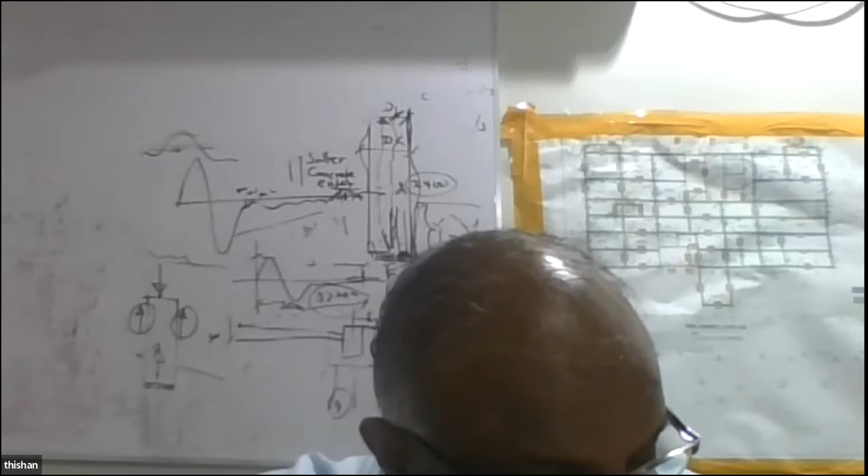Prima, can you hear me now? Yes, sir, we can hear you. I'm just trying to see whether I'm using two devices today. What I'll do is leave my phone and just check whether you can hear me. Can you hear me now? Yes, sir, we can hear you. Last time the computer did not work, so I had to use my phone, but if I use only the computer, it's better for all of us. So now can you hear me? Yes, yes, I think the sound is not that strong, very, very light. If you can increase the volume, sir, that's... yeah, please. Now just try this one, right? I'll come on the phone and see whether it's clearer. Just one moment. Recording in progress, can you hear me now? Yeah, well, now it's better. Better, right? Okay, it's better, right? Okay, yeah, now it's okay, sir. But am I getting an echo? Right, okay, can you hear me now? Yes, yes, yes, no echo now. Right, okay, now it's fine. I'm using my phone for audio and video, and I'm using the computer as well, right?

Okay, so what I'll do is, last time we started the problem, so today we'll go ahead with that. Can you see this SAP 2000 screen? Yes, yes, we can see. So what I'll do is first we'll change the units to kilonewton meters, and I'm going to do the modeling part today. I will explain the important points as we do the modeling.

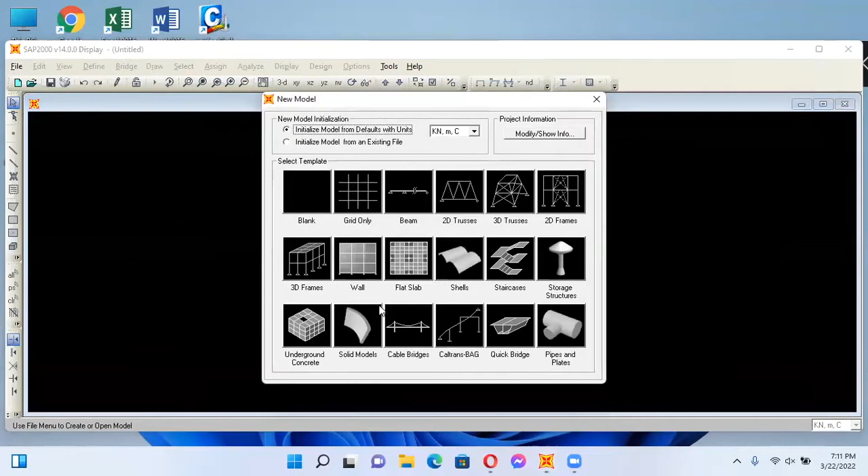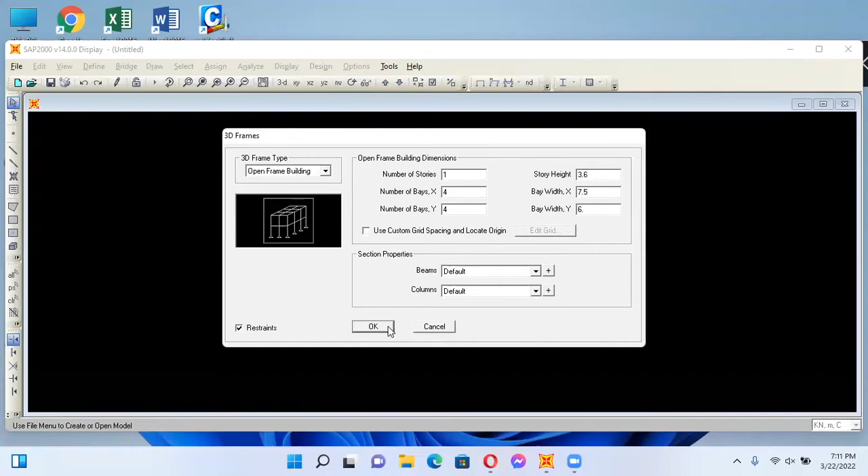I'll start with a new model, and I will go for a building 3D frame. Number of stories, I'll go for one story first, number of bays 4, and number of bays in the y direction 4, floor to floor height 3.6 meters, in x direction 7.5 meters, y direction 6 meters. So I'll create this particular building, and the building looks like this. You can see the building. Yes. Okay, right.

So basically, this is the building, and if you want, I can show you the view at 3.6 meters. So this is the building, and you can actually move the whole thing and bring it to the center. But I'll keep it as it is because otherwise I have to change the grid location as well. Sometimes it's preferable to have the grid starting at one of these places, but in this case I won't worry about it. The reason is, when the grid starts at the lowest corner, you always have positive values; otherwise you have some negative, some positive, which can create problems.

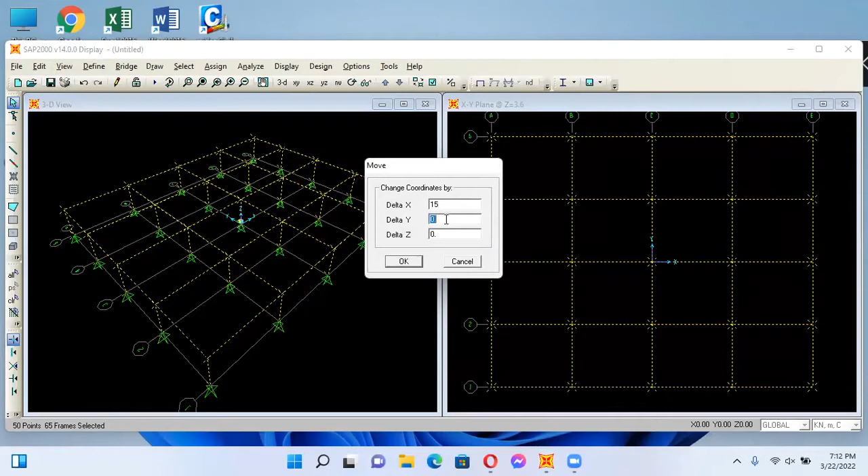But okay, so one option available is to select all and move - by 15 this way in the x direction, and 12 in the y direction. But the moment you do that, you will have to define the grid.

Define the grid - where's the grid? Yeah, grids. Global, modify, show the system, and here you start with 0 and then 7.5. So rather than giving ordinates, you go for the spacing, and you say here also 7.5, and 7.5 - sorry, not ordinate spacing. Here you change it to 7.5 each. I put it to spacing and see ordinates. Now you can see it starts from 0 and going up to 30.

And I'll do the same thing for this one - go to spacing, 0, 3.6. When you go to ordinates, I'll make it 0, 6, 12 - spacing.

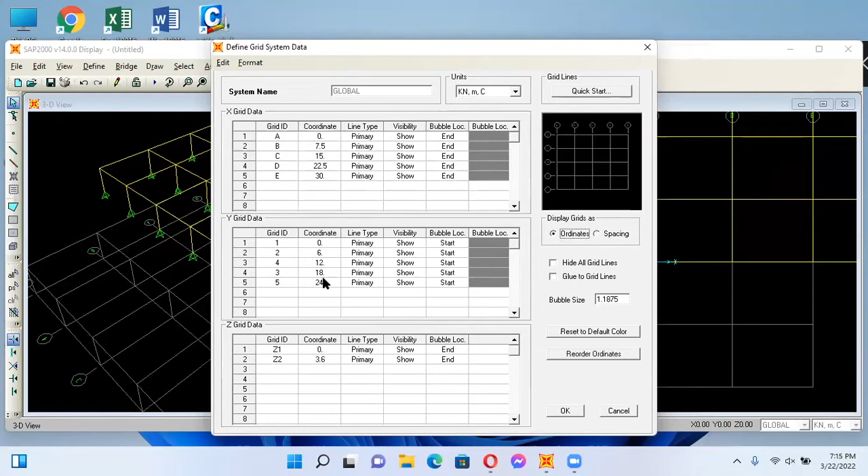Right, now it's okay. Now you can see the grid has been adjusted. It goes A, B, C, D, E, and this way 1, 2, 3, 4, and the origin is at this point.

So the most important thing is, you have to define so many things. First, materials. I'll make a copy of the material, go for advanced property display, and say concrete, beam concrete. I'll start with something like 30 megapascal concrete, but later you can change it. Elastic modulus of 30 megapascal is 27 e to the power 6, and the unit weight is 25, mass density is 2.5, because Eurocode says the density is 2.5, and the strength of the concrete is 30 megapascal.

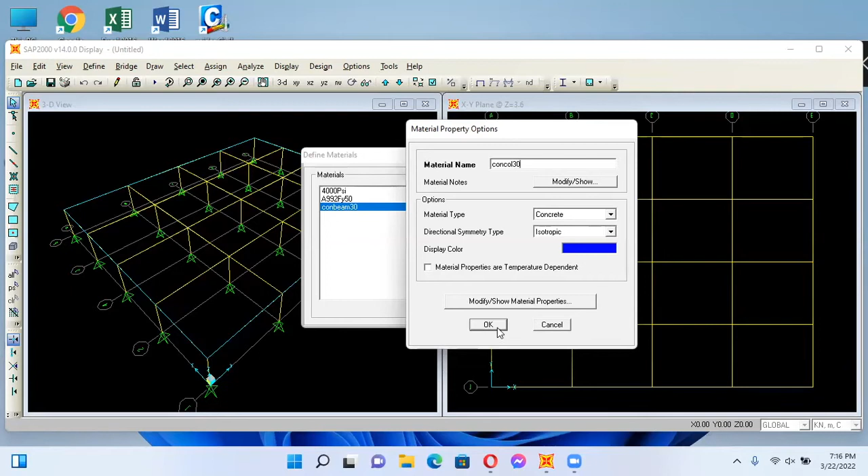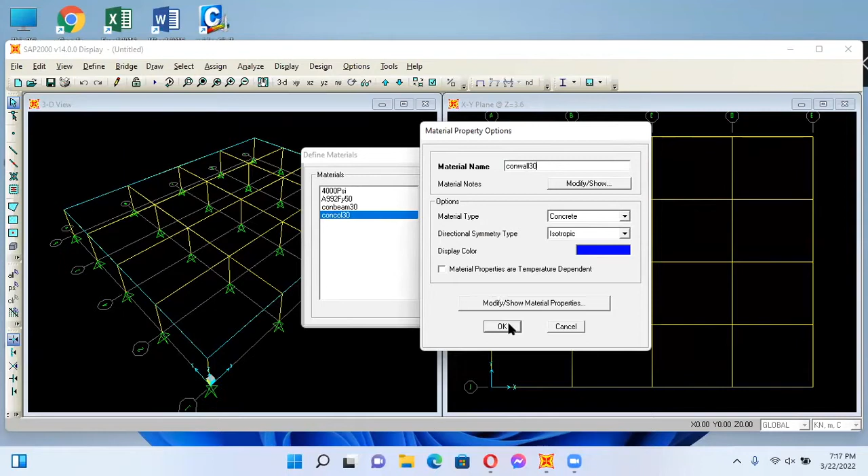We say okay. So basically we have one material, then add a copy of the material, concrete beam 30, and we say it's column concrete, column 30, concrete column 30, say okay. We have concrete beam 30, concrete column 30, and we have columns, beams, and add concrete wall 30. So we are having everything out of 30 megapascal. I think that day we did something like that, okay, I say okay.

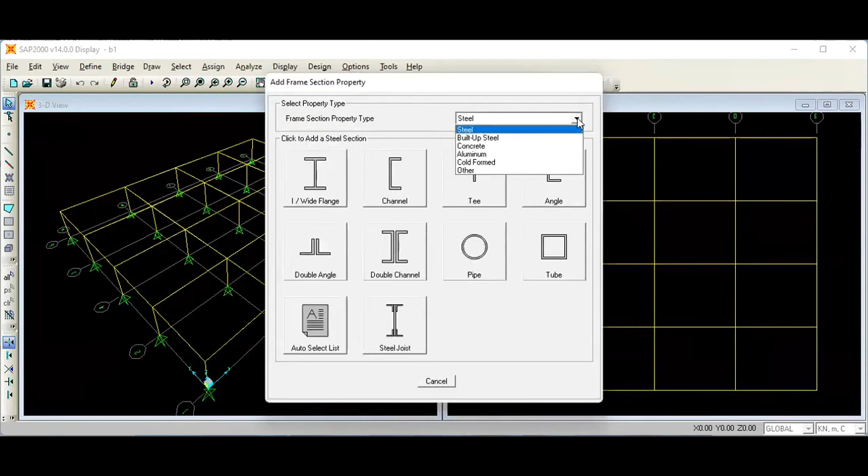We have defined 3 materials, it's okay. Then define section properties, frame sections, and add a new property. I'll go for concrete, and add a rectangular section of column concrete, beam concrete 30. I'll say beam 600 by 400. We'll not worry too much about it. Depth is 0.6 meters, width is 0.4 meters.

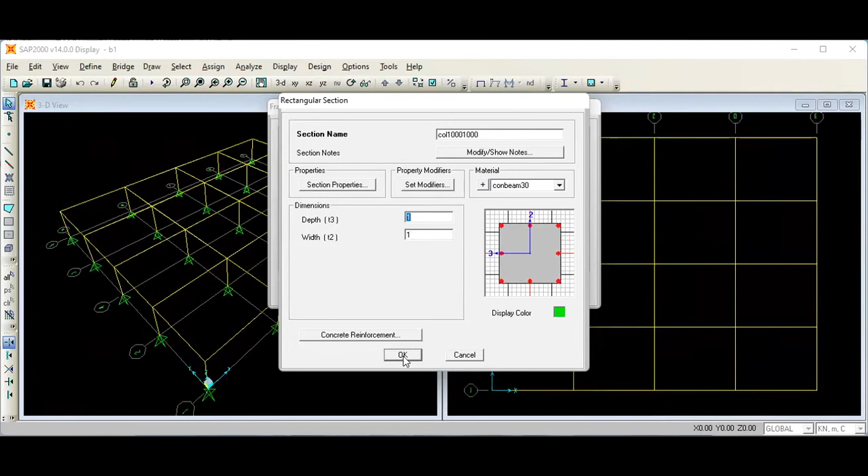Then we can add another section, and that is column, 1000 by 1000. So beam 600 by 400, column 1000 by 1000. Generally, that is okay, we say okay. And as we go, we'll define other things.

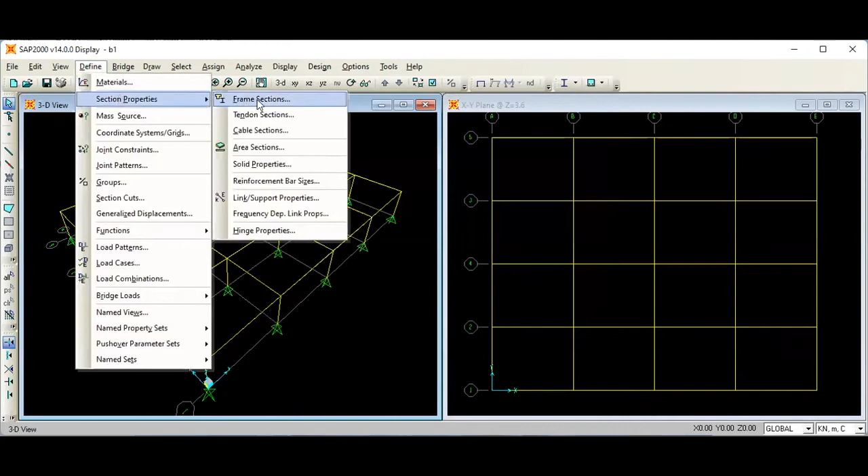Then frame sections, tendon sections, cable sections, area sections. We'll say we are going to use shell elements, add a new section, and say wall. All the walls we are going to use 250 for the time being. We say shell thin, it's okay, and we'll use wall concrete 30. The membrane and bending thickness is 0.25, 0.25. I'll explain it later: the bending thickness is used to calculate the bending properties.

Membrane thickness is used to calculate the membrane stiffness and the weight of the structure. So when the program calculates the weight of the wall, it is based on the membrane thickness, whereas when calculating the stiffness, it's based on the bending thickness. In addition to that, you get something called set modifiers — you can modify the section, whatever section you want. All these modern programs allow you to modify the sections, so we'll use that facility, and we say okay.

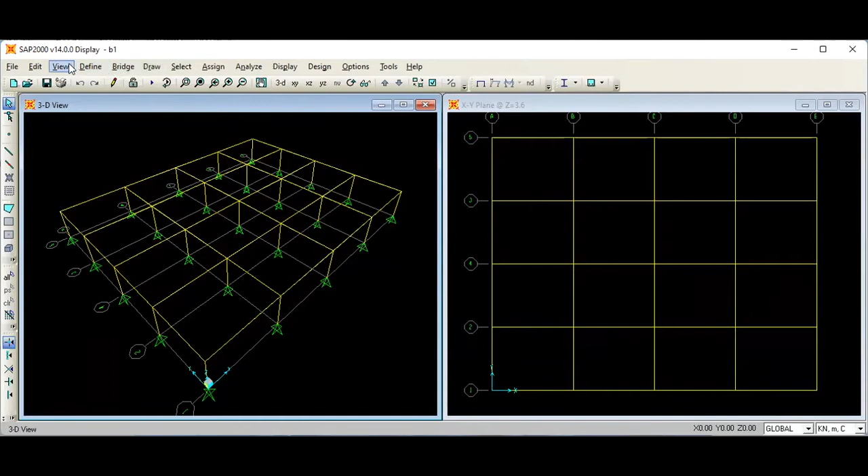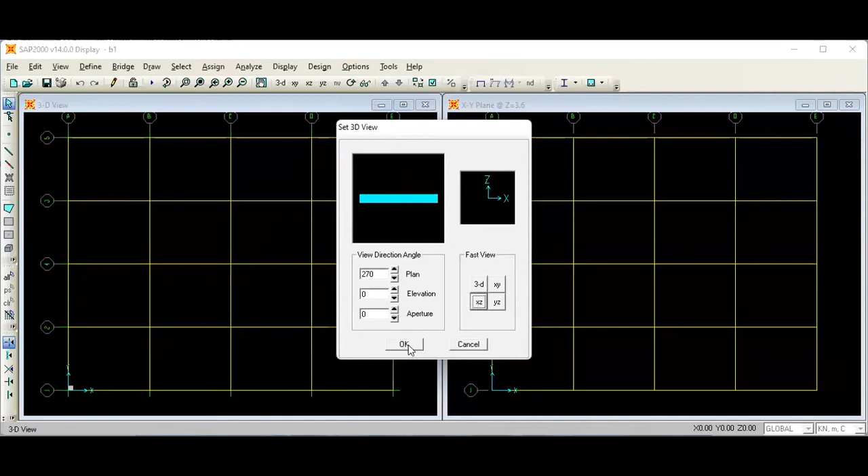Now we are in a situation where we want to allocate the column of 1000 millimeter by 1000 millimeter to all. So to allocate that, I can go to view and go for a 3D view, and say let's look at XY, generally make it 0. XY is, we are looking at the plan view. And we go to 3D view, and we go to XZ. Here you can see we are looking at an elevation, and I'll put this on 3D so you can see what's going on.

What I do is I select all the members like this, so all the members are selected, and now I can assign a property for that. Assign a frame section, and I will allocate it as columns. So it's all allocated as columns. If you want, you can go there and extrude the view. You can see everywhere column has been allocated, the beam is small.

Then I'll change it back to the normal view, I'll not extrude it, let's see the normal view. Then what I do is I will also do a small trick, and I'll say assign... no, I don't really have to do that. What I do is I'll go the other way — I will clear the selection.

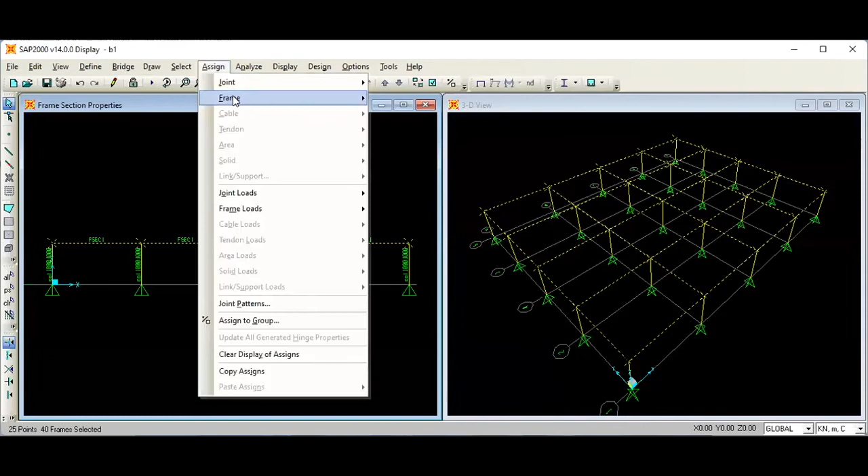Now what happens, I have selected all the beams but not columns. So you can manipulate the mouse and select different things. What I do is I'll assign the frame sections and make sure they're all beams. You can extrude and see whether you have got it right.

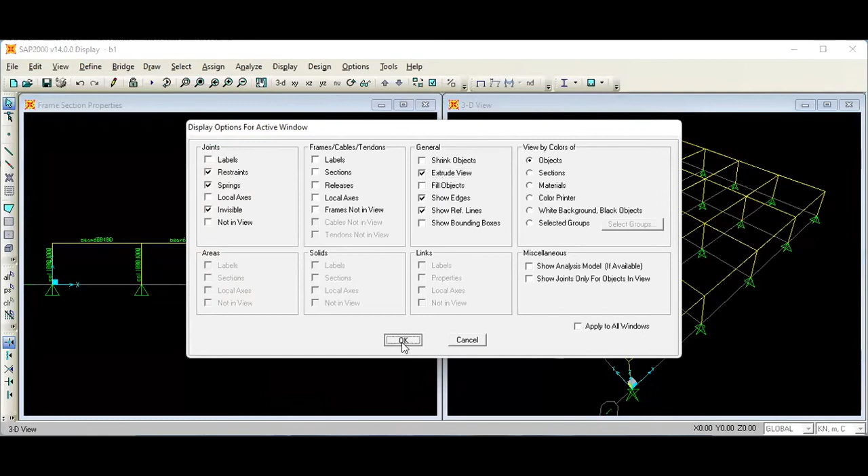So what I got to do is I'll assign. So I'll view, extrude the view. Right, now you can see I got all the beams.

Now what I do is I want to allocate the columns, walls, shear walls. So to allocate shear walls, there are a few locations where I don't need columns.

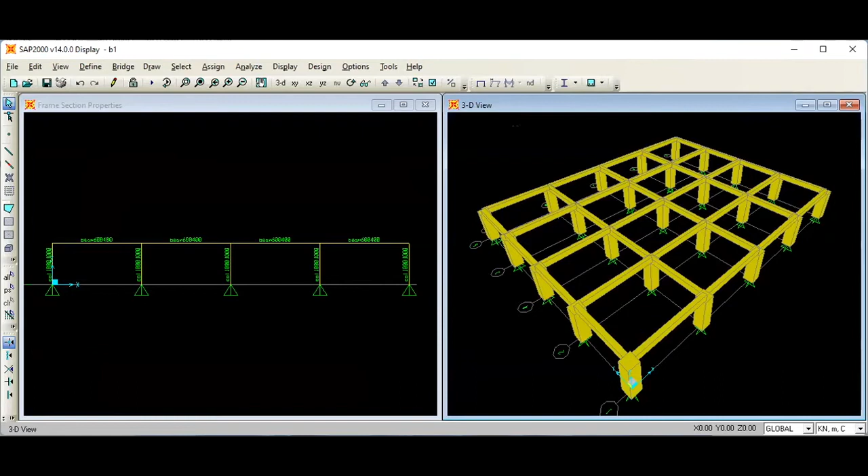So what I do is I'll go back to, so basically I don't need a column here. I don't need a column there. Do not need a column there. And I will also not need a column here. So I'll delete those columns that I don't need.

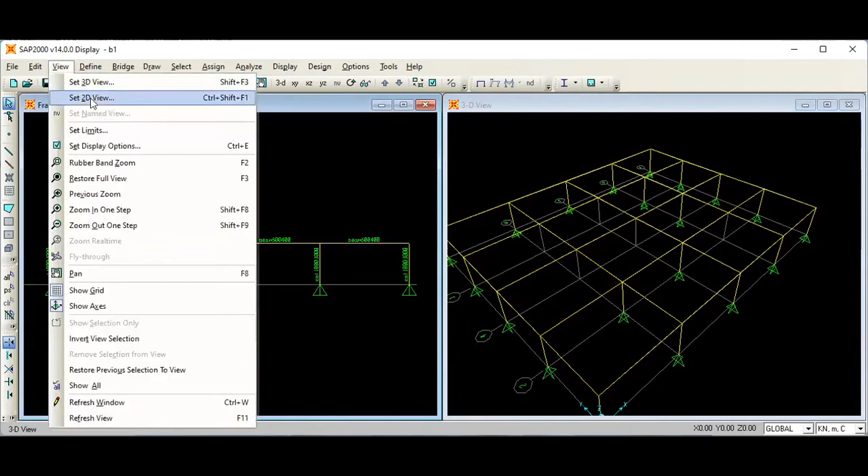And now I'm trying to get this sorted out with the walls. So what I do is I'll view 2D at this location. Now you can see the size of the beams all marked.

What I do is I'll work out the shear wall arrangement. So I say replicate at 2.5. I'll replicate here.

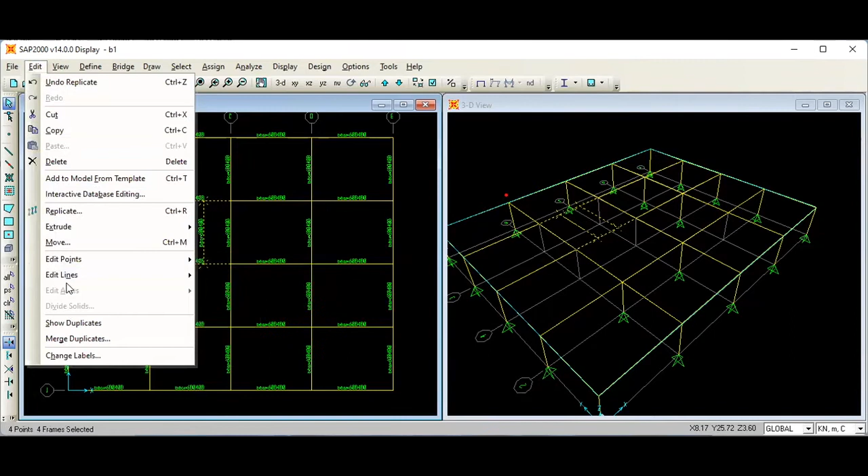Split by minus 2.5. Well, now I have got two boundaries of the lift system. So what I do is I will divide all these members, select all these members and ask it to divide at the intersections. So divide frames, break at the intersection.

So basically now I have divided the members and I should be able to extrude.

I'll use it to replicate it at 0, minus 3.

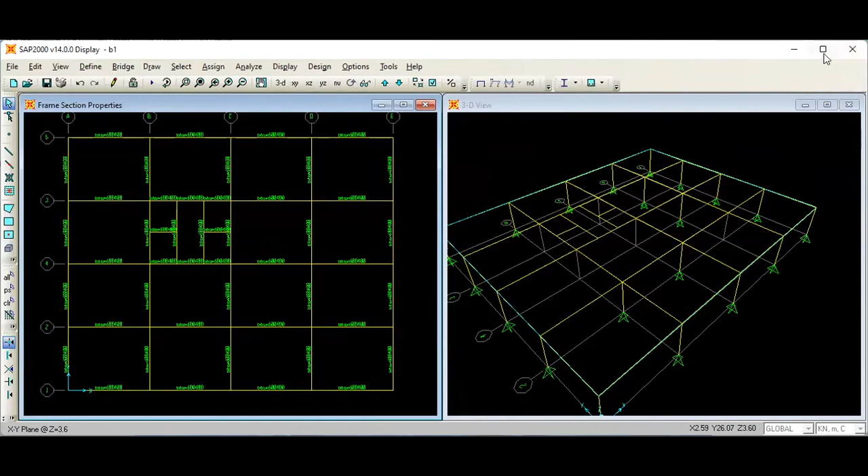So now what I can do is... stuck, I think. Just one moment, I am stuck again. Save changes.

Open. B1. Save as. In SAP, it's a good practice to save often. So what I do is I will select these points. All right, I have to divide this.

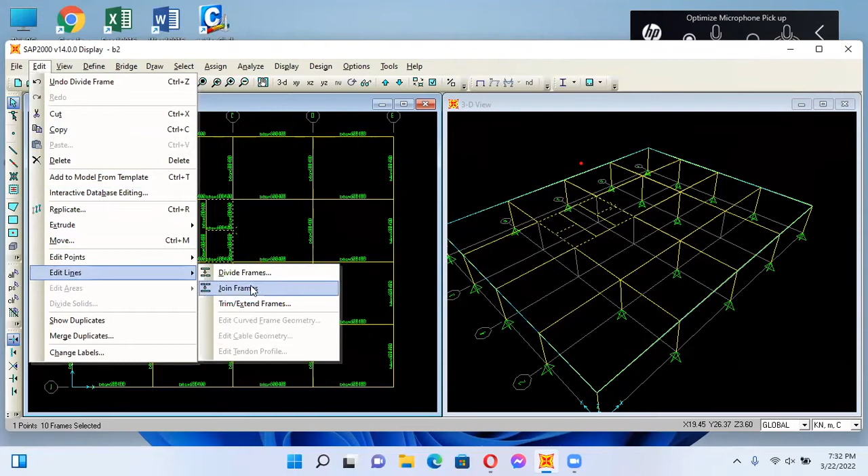Now what I do is I selected all. I'm going to extrude. Extrude lines to areas.

And it asks a question: delete the source object. I'll say don't delete it, because sometimes I like these beams because you can't apply loads on wall. So what I generally do is I'll have an additional beam as a small section beam, which can be primarily used for load transfer.

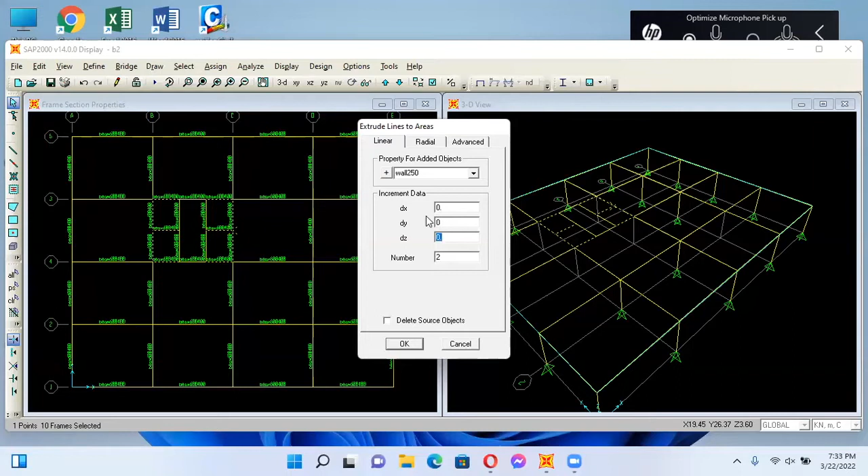Right, so what I do is it says property for added, so linear, and this 0 and minus 3.6, and once. Now you look at the right hand one to see what happens.

Now you can see some walls have appeared and it's not very clear what these walls mean. So we'll go to view and set display options.

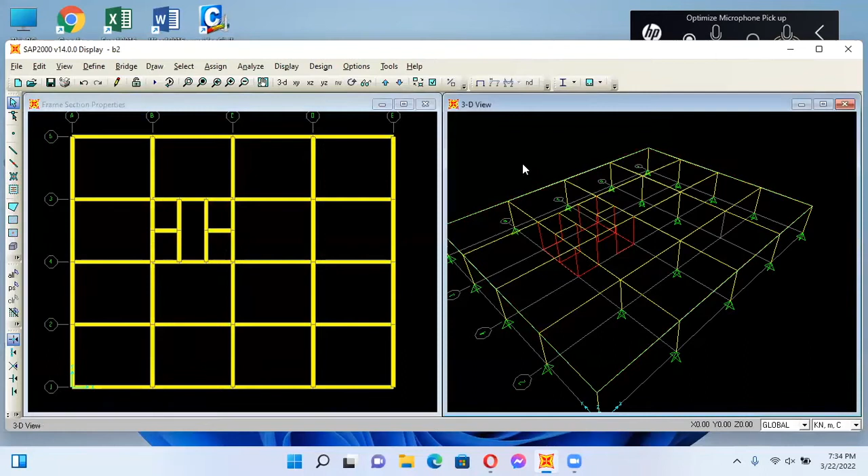Extrude the view. I have extruded it. I'll say fill objects. Now can you see I have created the shear walls?

But in an actual structure, you might have some other additional walls in the opening on the wall side. So you might have some small walls that will allow the fixing of the lift doors. Rather than a straight wall, you can have something like a return wall of about 600 millimeter or so. But I will ignore it because it will just take a little more time for me to create all that, and it's not really necessary because most of you know SAP, and I'm just trying to build it up.

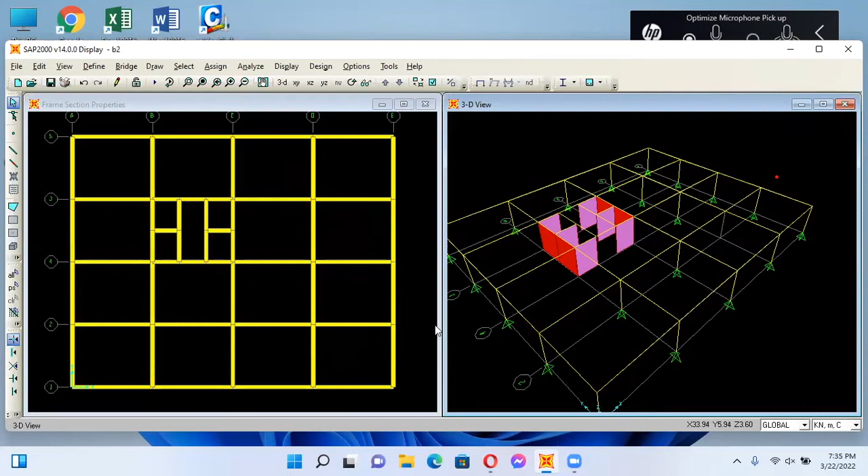So you'd be able to clear all your doubts, right? So now what I do is, I need 2 more walls, so I'll just go there and say view and extrude, don't extrude. So now it's clear that we have one set of walls. So what I do is, let's assume that here I can say replicate.

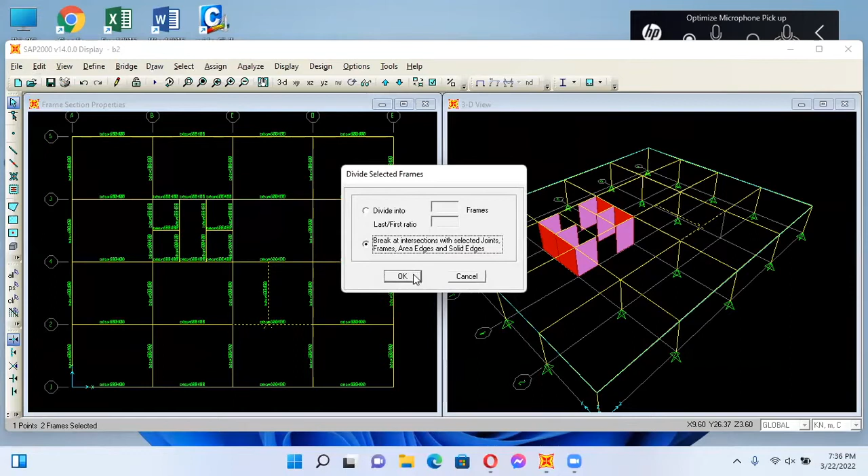And I'll say divide this. So what I do is I'll select this. There's one more column I have to get rid of, that is this column. I'll select this and this.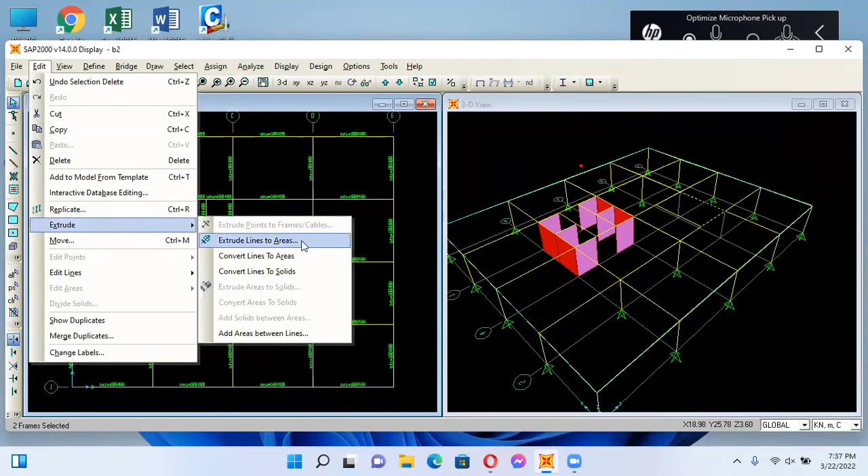Extrude, lines to areas, same thing. I extruded, so I don't need this particular member. Would I need it? Let's see. Yes, before I divide it, I will divide it.

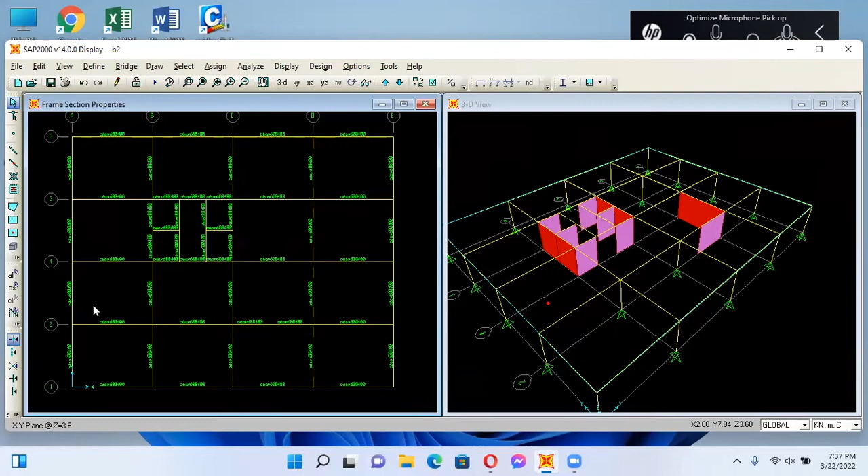I'll delete it, and if you need, we'll have it later. So you can see now we have got all the walls sorted out. And if I extrude the view here, now you can see the problem.

And because of that reason, we like to have a beam on the wall. The reason is SAP does not have a facility to apply the loads directly on the wall. So what we do is we define a wall, so we define a beam.

So that means I have to go to properties. I'll save this as B3. Save.

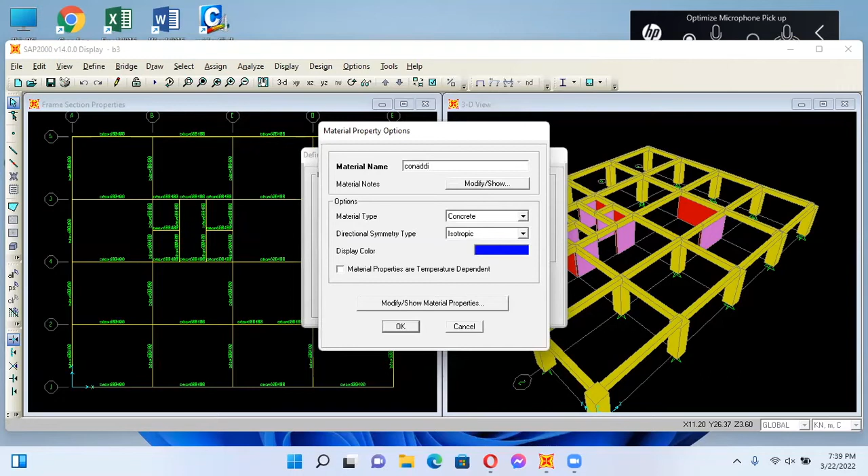And what I do is I'll define a new property, but before defining the material... concrete additional beam. I'll apply a material and I'll show the properties. The same, but here I like it to be weightless. And here I like it to be massless. So basically I have made it a weightless material.

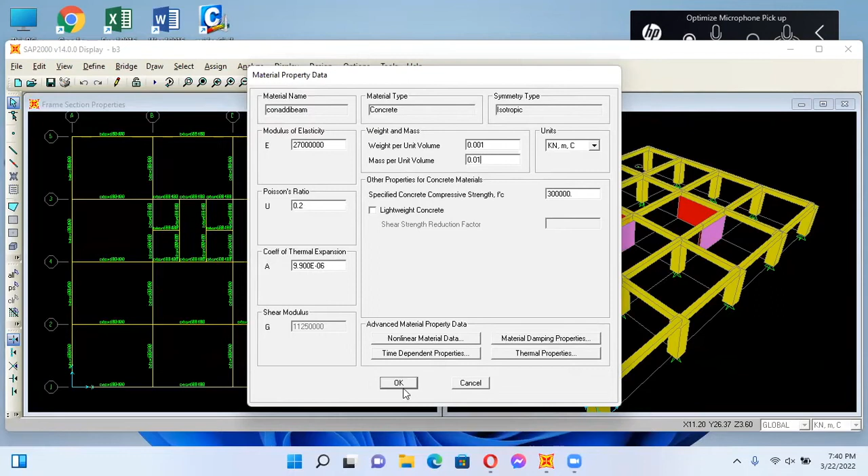Then what I do is I'll define a small section and add a copy of the property. See, I'll say additional beam, 200 by 100. Very small beam.

It's a small beam. And I'll have an additional beam. And what I do is I will assign, select these additional beams.

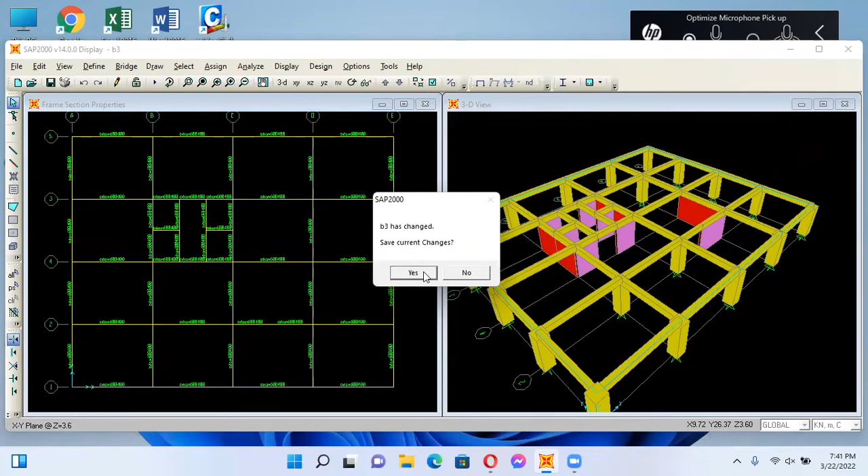Oh, it's stuck again. Just one moment, I'm just trying to get SAP back. It's open.

Right. So what I'll do is I'll add these. So I'll assign.

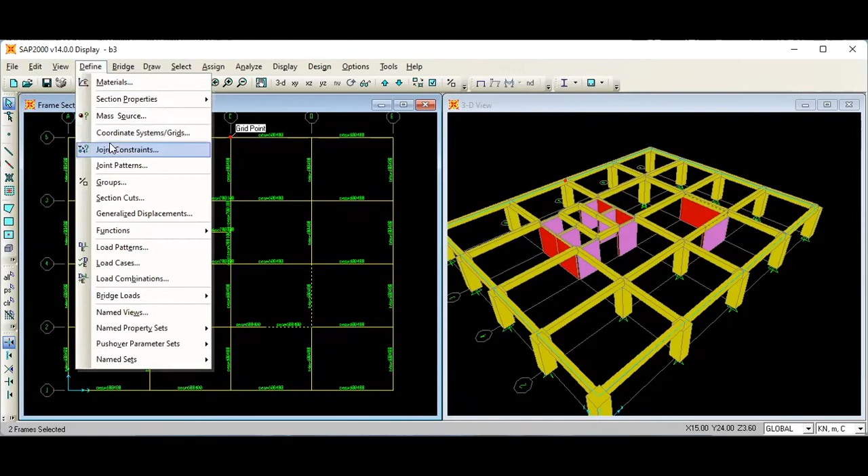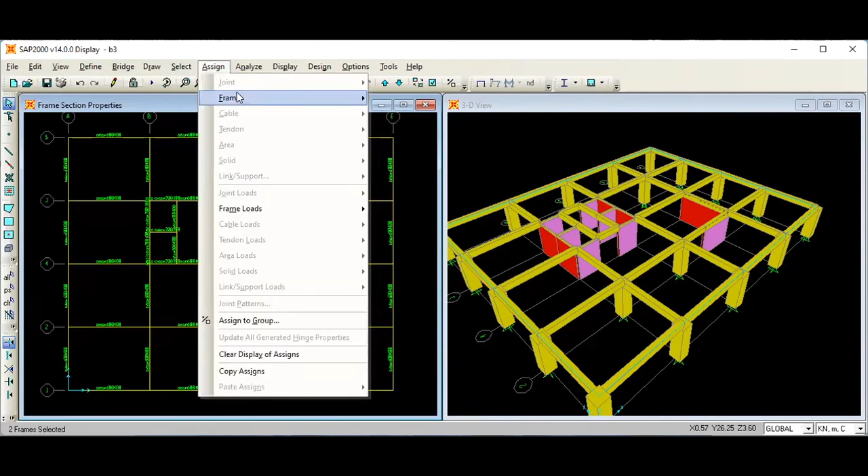And also we have to do the same thing here. Assign, assign frame sections, and yeah, okay. Right, so I have made the beam section smaller at all the locations that I'm having the walls.

Basically we put a beam to assure that the loads have been properly applied, because it's always easier to apply loads on the beams. And if the beams are having proper connectivity, you'll find all the loads can be easily transferred.

Sorry. And in addition to that, you can see here you might get another beam, not 600 by 400. So because of that, we'll define section properties.

And I'll add a copy of the property, and it will be beam 600. I'll say 1000 by 250. So that is 1.25.

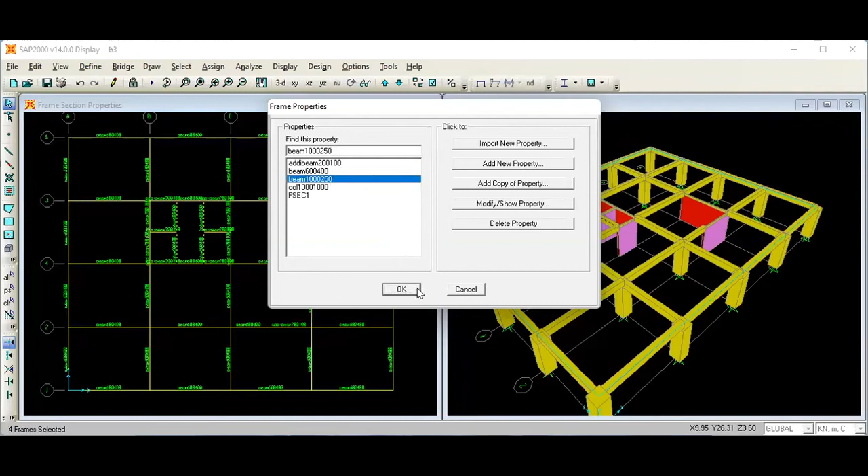Now can you see, because those beams have become deeper. The reason is, on the front of the floor to floor height of 3.6 meters, the front side opening can be anything from 2.4 meters. Around 2.4 meters, and above that will be the wall.

So I have selected just 1 meter by 250. But even in a real project, you can always calculate, if you know the size of the lift wall and the lift height, the opening height, you can easily work out the depth of the beam that you can get at those locations.

So now the first step is almost over. So I'll save it as B4, because there's a tendency today for my program to crash, get stuck once in a while. So until I get it checked, I will always - anyway, it's a good practice in SAP to check, save as much as possible, because sometimes it crashes.

Right, so now the first step is over. And so now we have to apply the loads. Before we apply loads, we see what we are going to do about the slabs. There are two purposes that the slabs will perform.

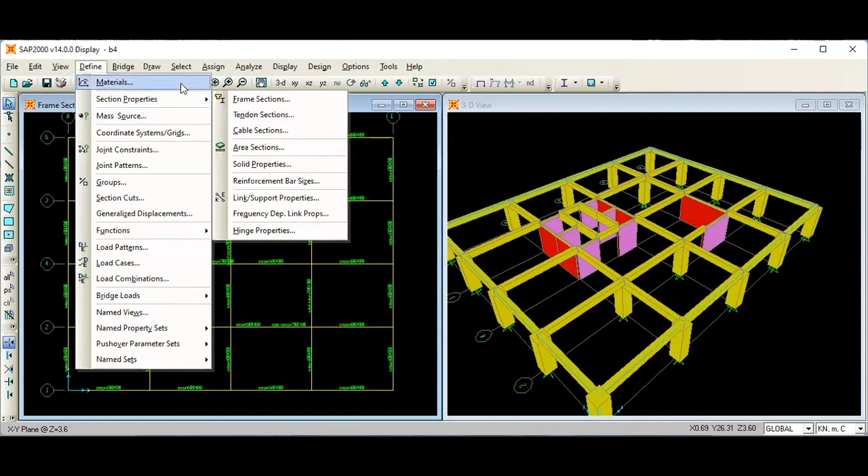So I'll show you with an example what I'm trying to say. For that, I'll define material, and I'll add, add a copy of the material.

I'll switch to the display. So what I want is, I do not want a weight. So I'll make the weight 0.001. And I'll keep the mass.

And we call it slab concrete. Slab. I'll say 200 millimeter slab, 150, 160, 170 millimeter slab. And I'll say okay.

And the difference between this material and the other materials is, here we can see 170 millimeter thick slab. And here you can see it's weightless, but it has a mass. So the mass is corresponding to the density, that is 2.5 tons per meter cubed.

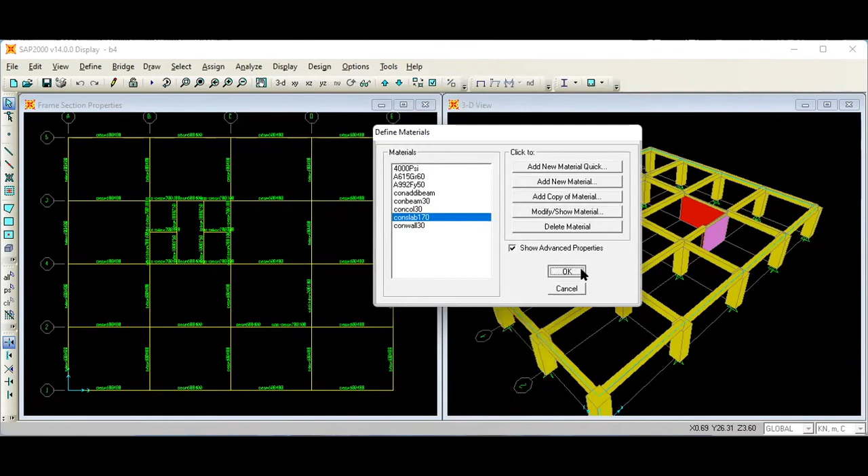So we have all the information we need. So now I'll show you what I'm going to do. Okay. I'm going to add, now I'm going to add a slab. And what I do is I'll use edit.

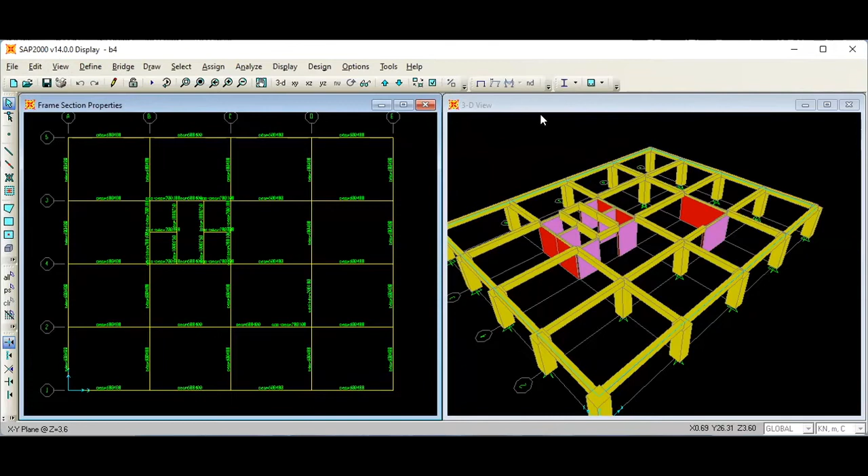Oh, it's got stuck again. Stuck again. Yes. Okay. And then I will start SAP again.

Share screen. Open it. And then what I do is I'll draw the slabs.

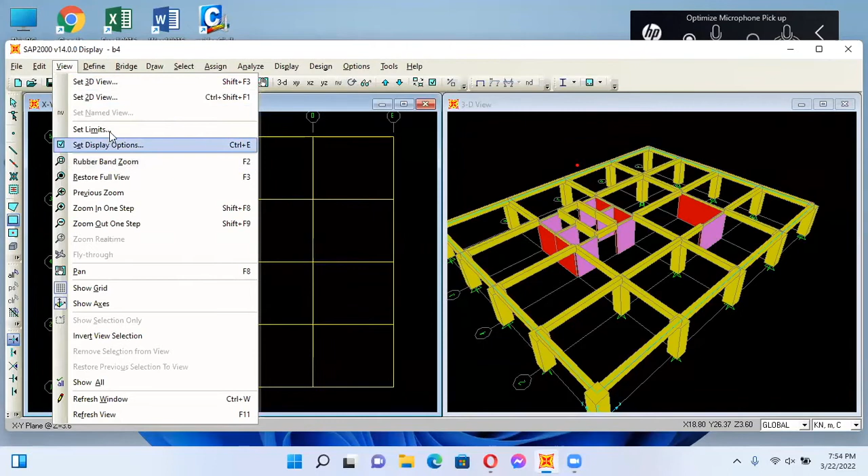For that, I'll assign... we have not defined a slab, so we have to define the slab. Define section properties, area sections, and we'll add a new section. Slab, 170, thin section, and then we are going to use slab concrete.

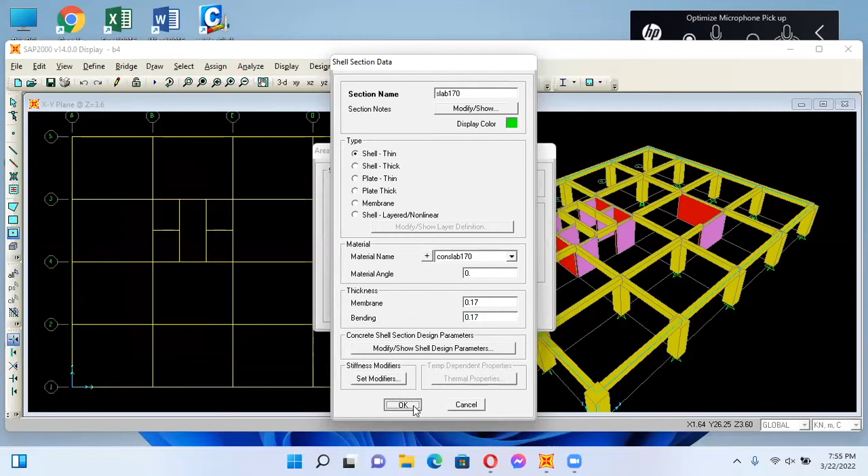With this, okay, and when you go for drawing, 170. Okay, so when you draw the slab like that, we have got the correct mass, but you know, it is connected only at the four points. It has connected here, connected here, connected here, connected here.

So because it's connected only at the four corners, we don't use it for any load transfer or anything. We draw the slab due to two reasons. One is when you have a slab, we don't have to define a rigid diaphragm, because automatically it will take it as a rigid diaphragm.

So what I want to say is, if you have the slab indicated, then it will act as a rigid diaphragm. On the other hand, you can actually define a rigid diaphragm at each floor. There are two options: one is representing the slab so that the in-plane deformations can be reduced, and it will act like a rigid diaphragm. But most programs carry the option that you can define it as a rigid diaphragm directly. In my case, I'll use this one.

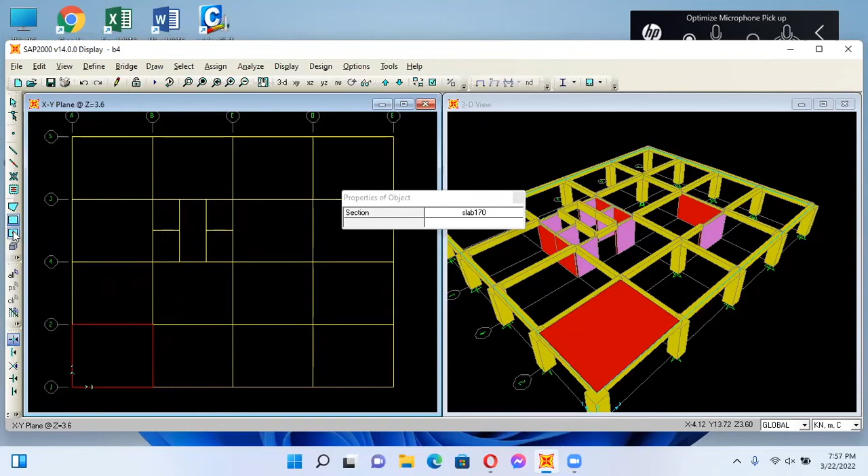Okay, we have all the slabs, and we also have to draw the slab there. Now you can see the floors all arranged. A rigid diaphragm action is now available. So now we have one floor almost done, so I'll save it.

Save as B5. Save it. Now I would like to apply some loads. See, in all these areas, I will apply unit load 1, and only these two small areas I'll apply unit load 2.

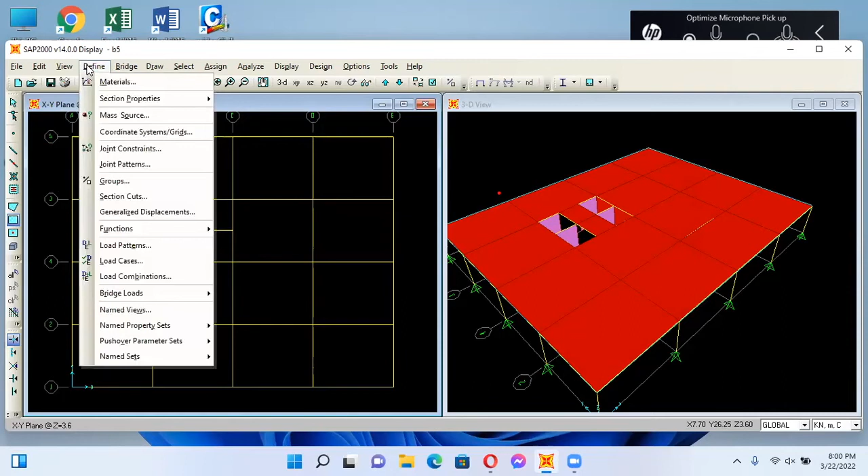So I'll define a load pattern. Unit load 1. And we have to say it's not a dead load... the new load pattern.

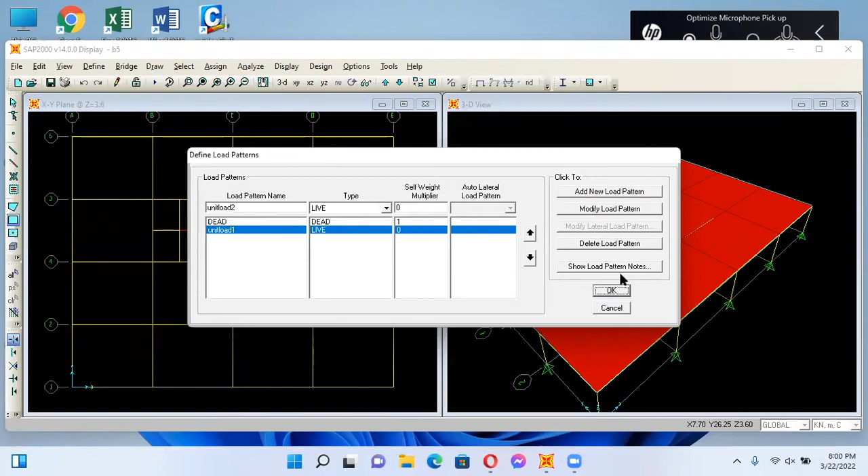I'll say okay. Right, now what I'm going to do is I will show how the loads can be applied. So I'll select this beam first to show how the load can be applied. And I can define the load pattern. Then what I do is I'll assign, select these frames. And because these are identical, I select this side also.

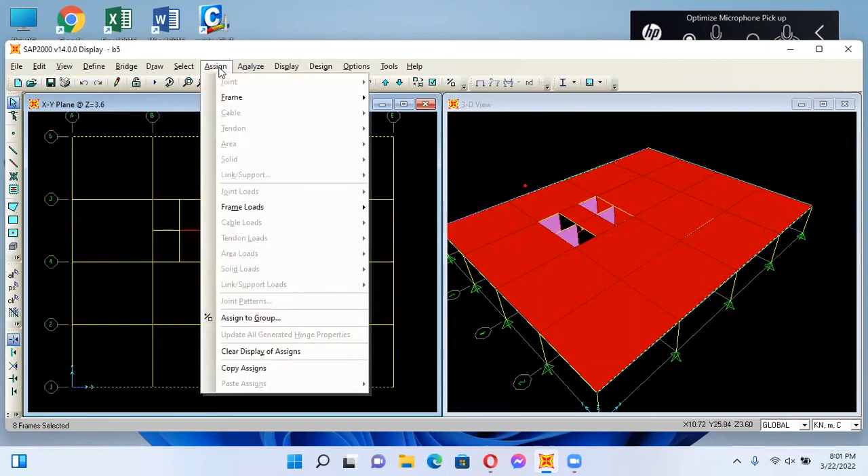Now what I do is I'll assign frame loads, distributed, unit load 1, so you'll get a situation where you can actually go for absolute distance from edge, and the actual distances will be 0, 0. At the end of 3 meters, you are going to get 3. Yes, on the 3 meters, 3. And at the end of 4.5 meters...

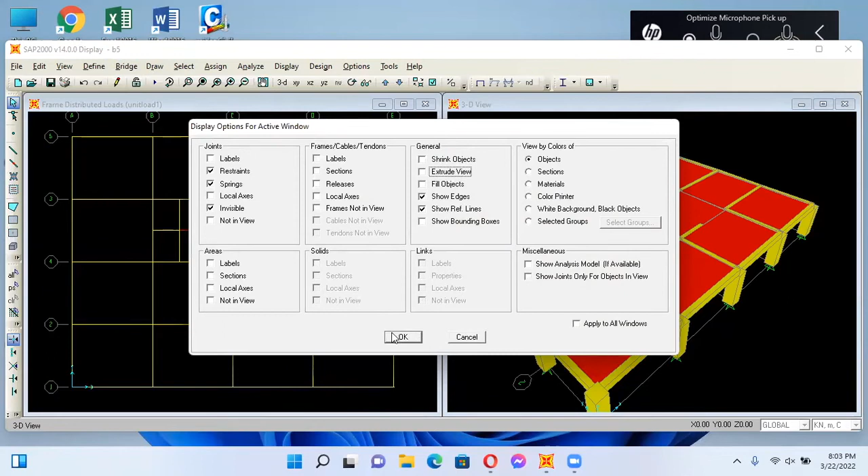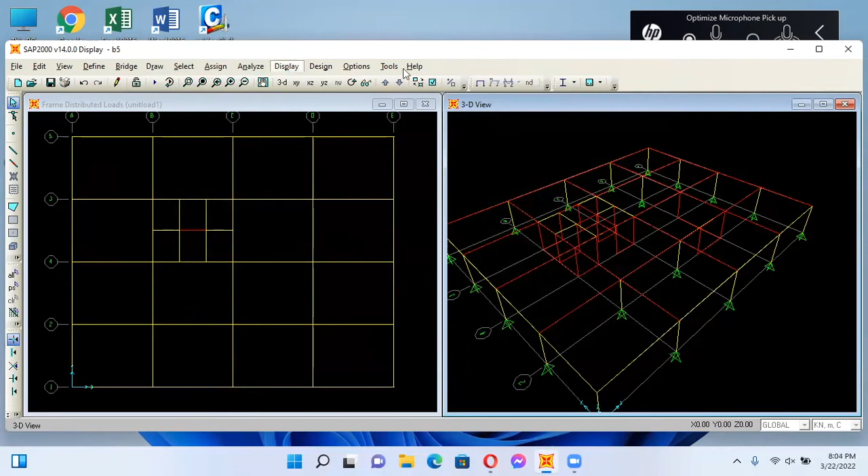Open b5, and then I'll share the screen. Display.

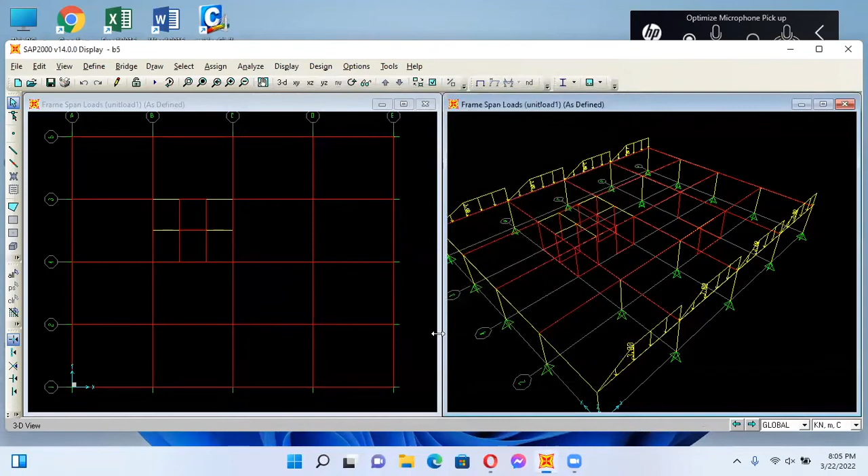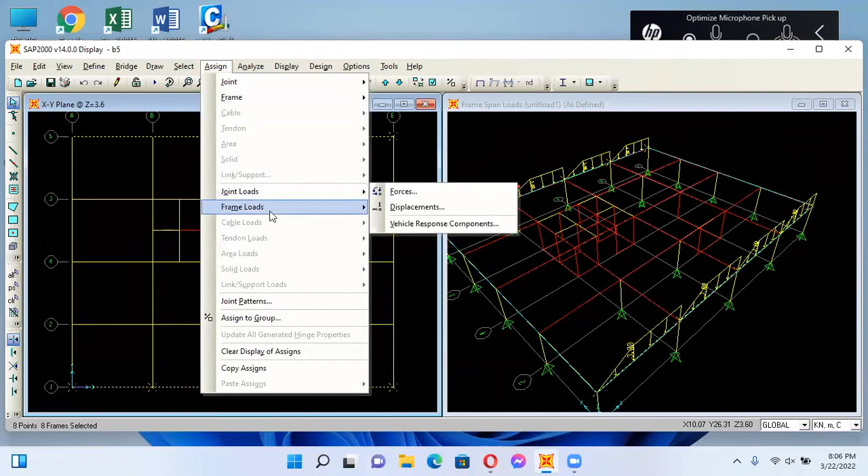Okay, there's a small mistake that I have made, and I have to apply loads. Assign frame loads, distributed, unit load 1. Also go for the absolute distances: 0, then 0, 0. When it is 3 meters, 3. 4.5 meters, again 3, and then at 6 meters, at 7.5 meters, it becomes 0.

There you are, now it's okay. So similarly, you have to apply loads at all the other members, these members, okay. And these members are also internal members.

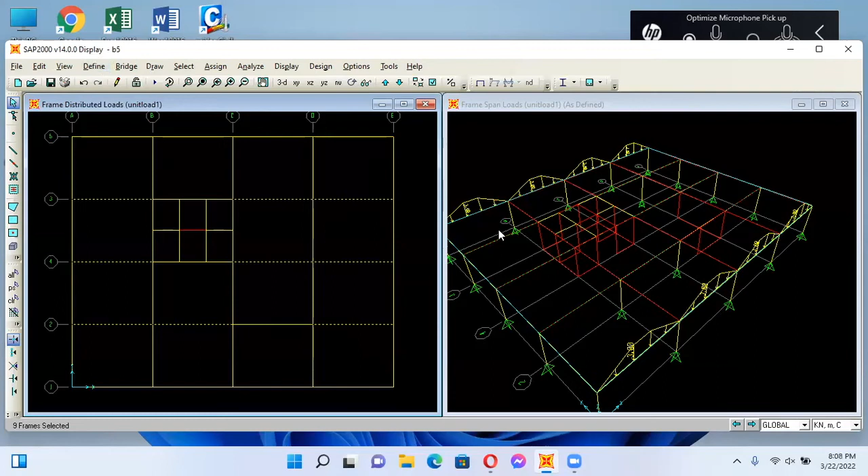So now I can apply the loads, but here you can see the loads are coming from both sides. So then when I assign frame loads, distributed, unit load 1, the amplitude is 6, here 6.

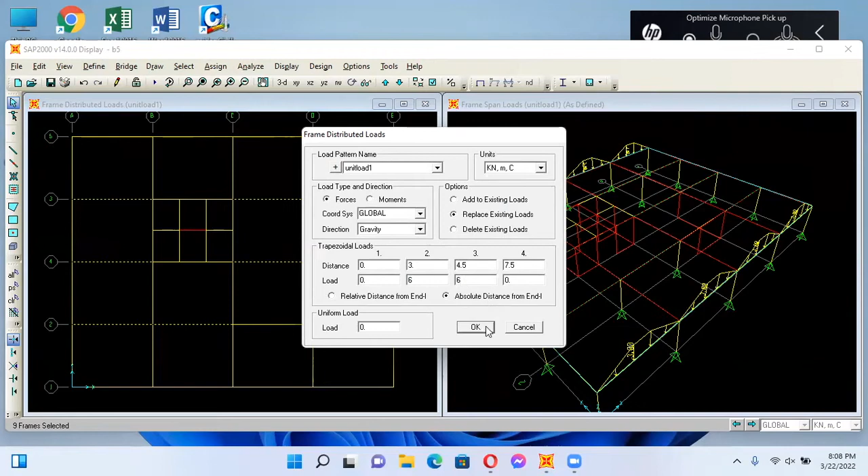Similarly, you have to apply loads on all the members. And if you look at the other direction, I'll say assign frame loads, distributed: at 3, magnitude is 3, and at 6, the magnitude is 0. This is 0.

Right, now we can see the loads. And then on these ones also we can apply the loads. And here you get it. Yes, here also you get it.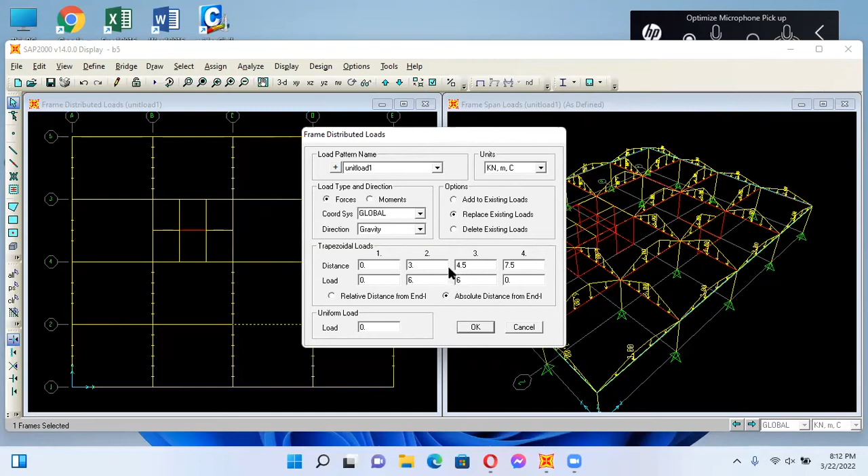Now you can see it's applied, but I'd like to see the breakage there. So what I do is I'll mark this one.

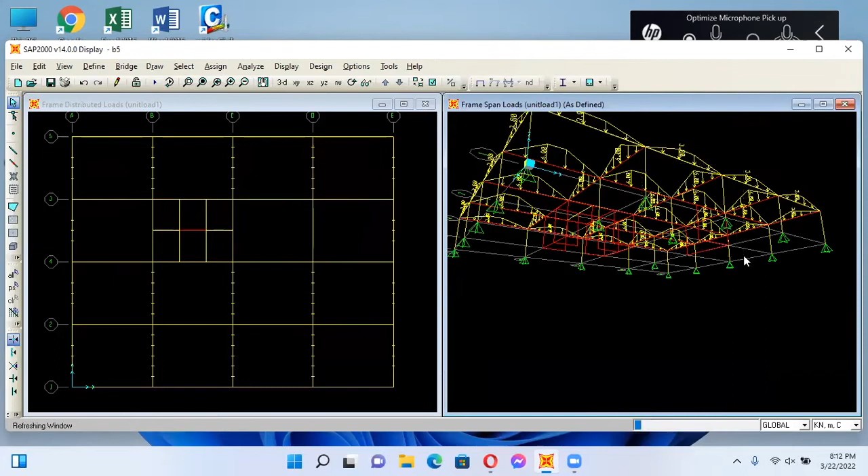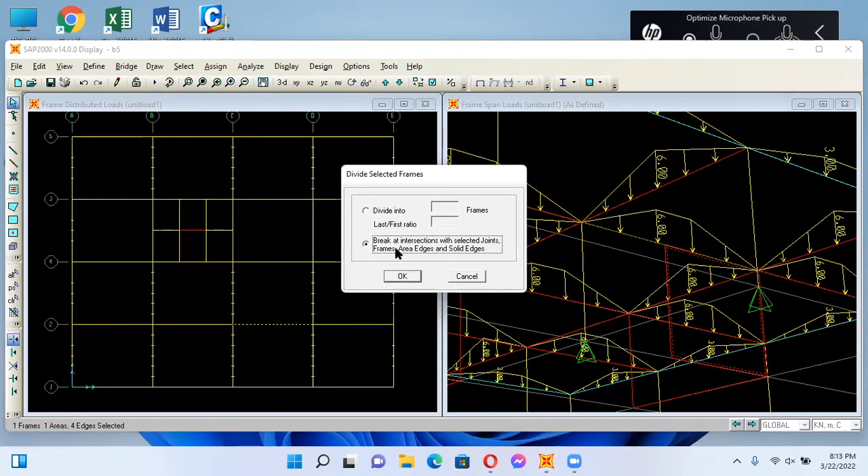And if I divide the lines, now you can see automatically it's divided. And the loading is automatic, but you can see there's a division, so it's all clearly indicated here.

So basically you have to apply the loads on all the other members similarly, and let's assume that we apply the loads, and unit load 1 is okay. So basically, let's assume that this is all designed as a one-way slab.

So now what I'll do is apply this. This kind of one-way spanning slab is because it's a small span, so I can simply consider it's one-way spanning, and then I will apply unit load 2. For that I have defined a load pattern called unit load 2.

We have already defined it, so what I do is consider that it's one-way spanning, and then assign. Oh, it's stuck again. Save. Stop share.

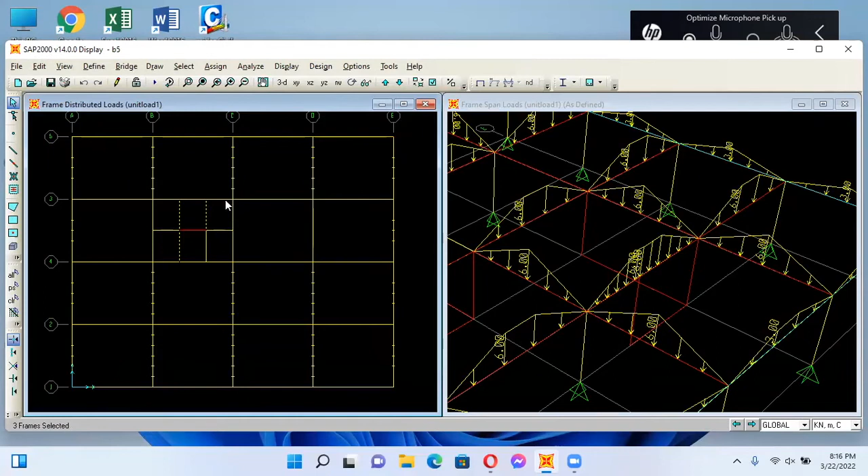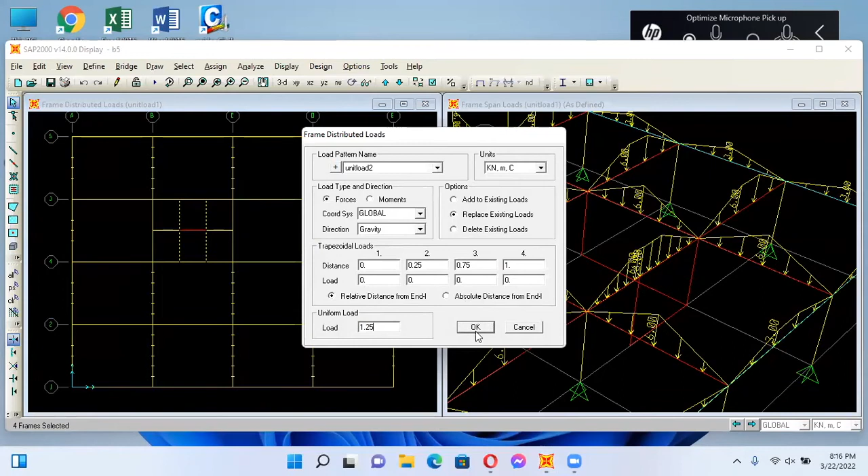And assign frame loads distributed unit load 2, and I can say it's a uniform load - the passage is 2.5 meters wide, so I can say 1.25. But the important thing is this is unit load 2. Now let's see whether it's displayed. The answer is it doesn't display, so what I have to do is...

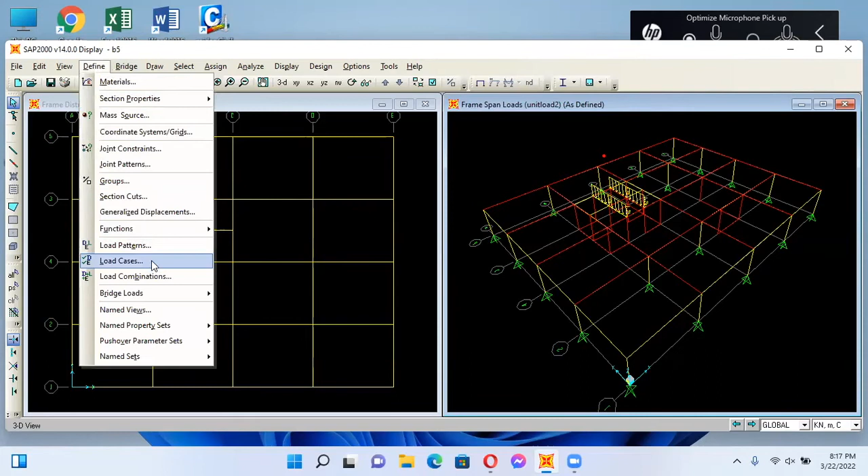There you are. So basically now we have two sets of loads, unit load 1, unit load 2. Then what you do is define load cases - not load cases, you define the load combinations.

We'll first say slab dead 1. Now we are going to define the self weight of the slab: linear add, unit load 1. You apply unit load 1. So if you apply unit, what is the thickness of the slab?

170 millimeters. So what is unit load 1? Unit load 1 is 0.170 multiplied by 25, and that is 4.25 kilonewtons per meter square. So we multiply by 4.25 and add it.

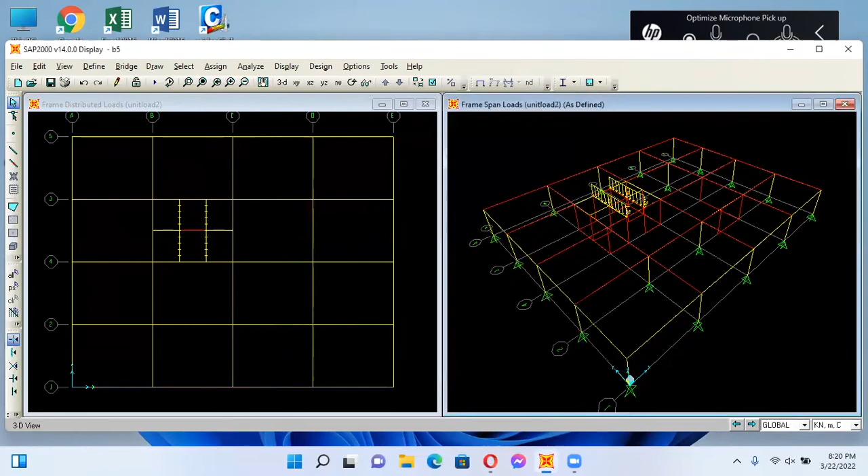And similarly we define the partition loads, finishes. So what we do is we can define a load combination, and we can also have slab finishes.

And then it will be unit load 1 multiplied by the finishes value. Let's say the finishes value with all the finishes, we'll come to about 1. So basically just keep it. And unit load 2 also 1, you can keep it.

And then we get slab partitions. Let's say we are going to allocate 1.5, and add new combo. You can say slab partitions, and unit load 1, load 2, 1.

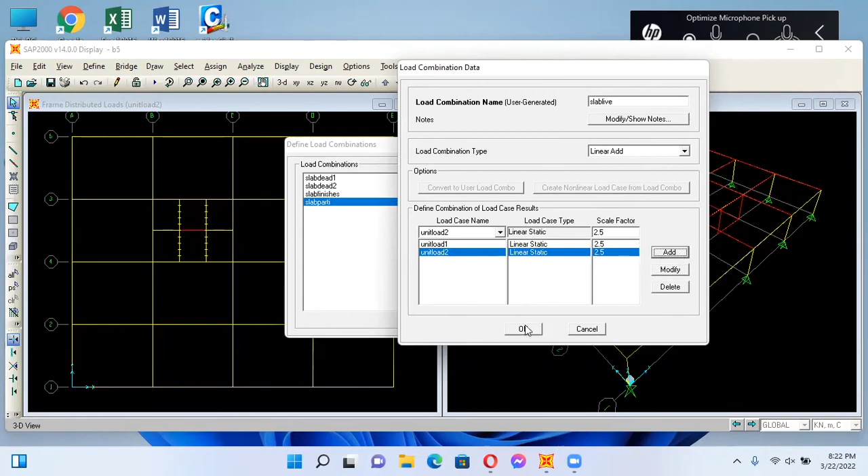Slab live. Let's say this is an office building and we are designing it for 2.5 live load. Right, and we say okay. And we say okay.

Now we can define a new load combination. Let's say we are going to have a load combination - I'll just demonstrate one, that is 1.35 GK plus 1.4, 1.5 QK. So let's say it's combination 4. So dead loads will be there, because the dead loads will come only from the weight of the columns and the beams, and we have to multiply all the dead loads by 1.35. Get it.

Then we have slab dead, multiplied by 1.35, add slab dead 2, add, and slab partitions, add, finishes, add, and slab live - you have to multiply it by 1.5.

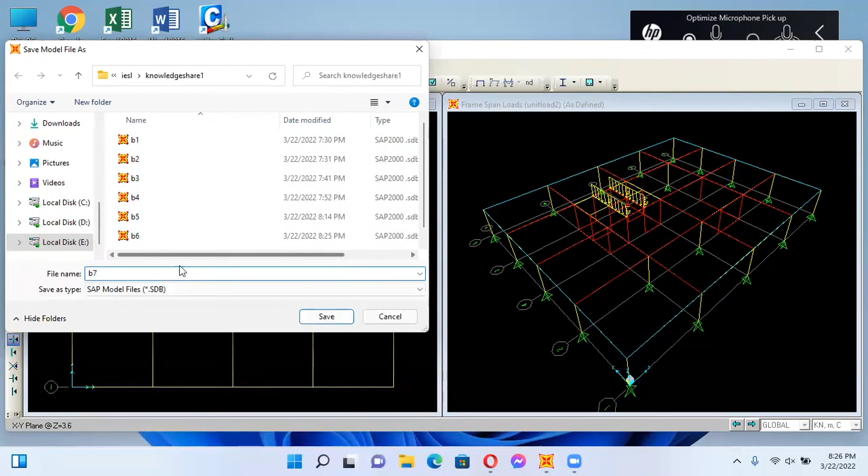Share the screen. You can see the screen and open the file. And then I will save as b7. And I'll go for the 3D view.

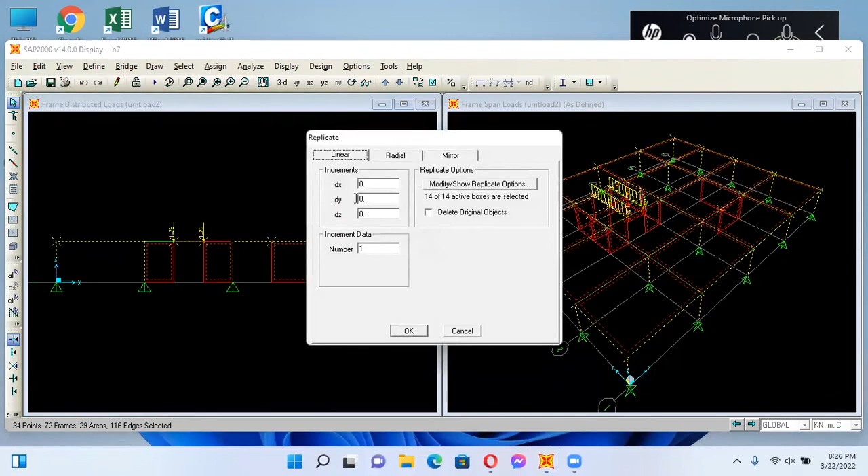So basically, the whole process is we carefully apply all the loads and create the combinations. And once you do everything properly at each floor level, you can easily create a model by replicating it. And you can have a building model like this.

And once you model it, you can ask it to analyze it. And so you can see all the different load combinations, places are there. And you can ask it to analyze. Unfortunately, again, it's this.

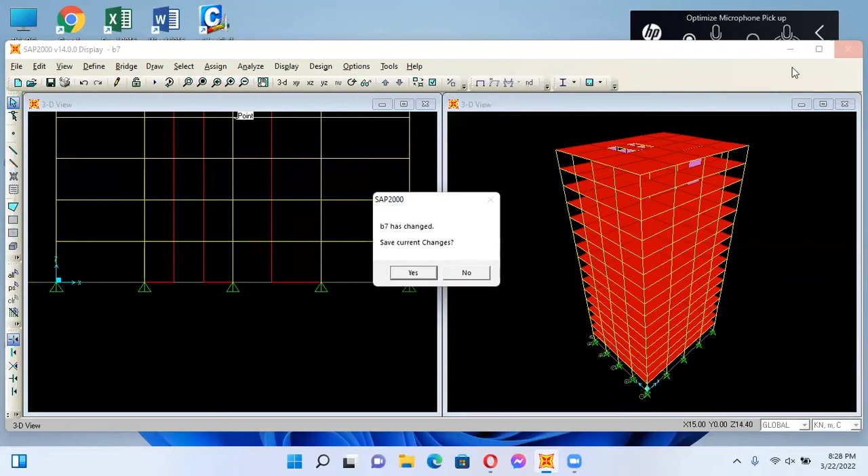So, yes, save changes, yes. And open it again. Stop share. Share the screen, share. Open. And then I'll ask it to analyze it.

There is something more. Stuck. It's stuck. So basically, after you do all this, you can analyze and get some results. But the important point is, you have to carefully apply the loads on the beams. And you can also go for different slab thicknesses by defining different unit loads.

And also this is one of the methods that you can use for applying the loads. But some programs allow you to apply the loads with the magnitude directly. And my experience is, this method also can work pretty well. And I think for large buildings like Altea, I think I use this method.